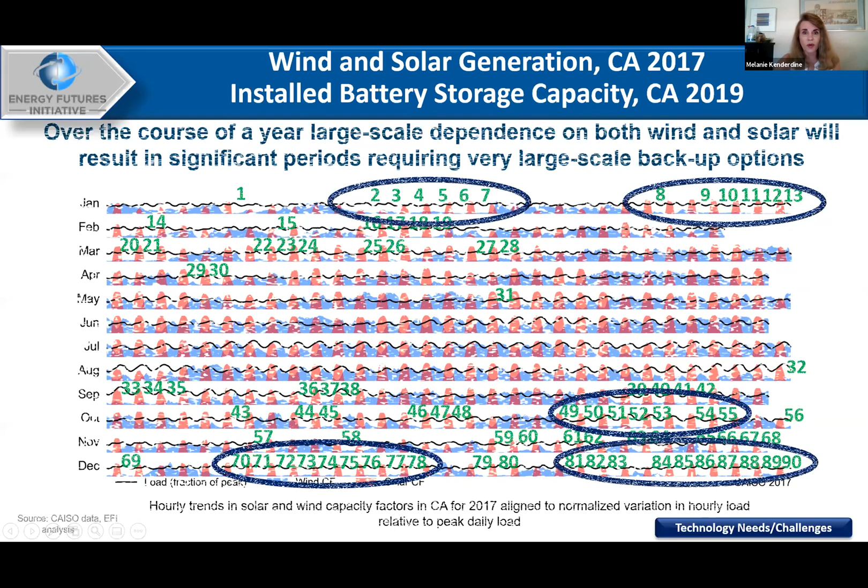And I would say the difference between California and Texas, it was just different times of the year when you saw no wind. And I should also say these are data. This is not modeling, these are data. So those are actual numbers. And so you had 1/4 of the year basically with little to no wind, and 11 days in a row with no wind.

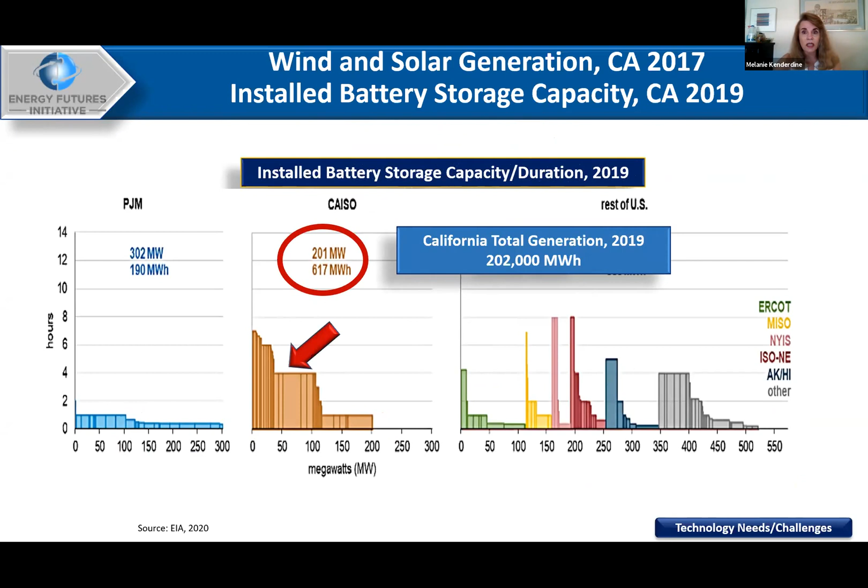This is installed battery storage in California in 2019, 617 megawatt hours. And those brown bars you see there, that is duration. So you have some 6-hour duration. I don't know what that is, okay? But it's basically 4 hours duration and 617 megawatt hours.

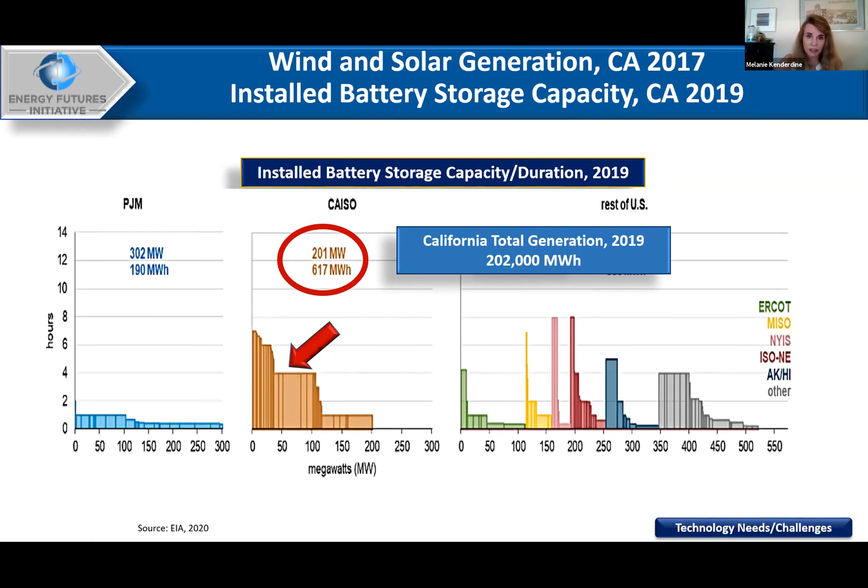California's total generation that same year, 202,000 megawatt hours. So to meet those 10, 11 days in a row with no wind, it's linear. As I understand it, it's 4 hours plus 4 hours plus 4 hours plus 4 hours. So you're talking about a lot of batteries here.

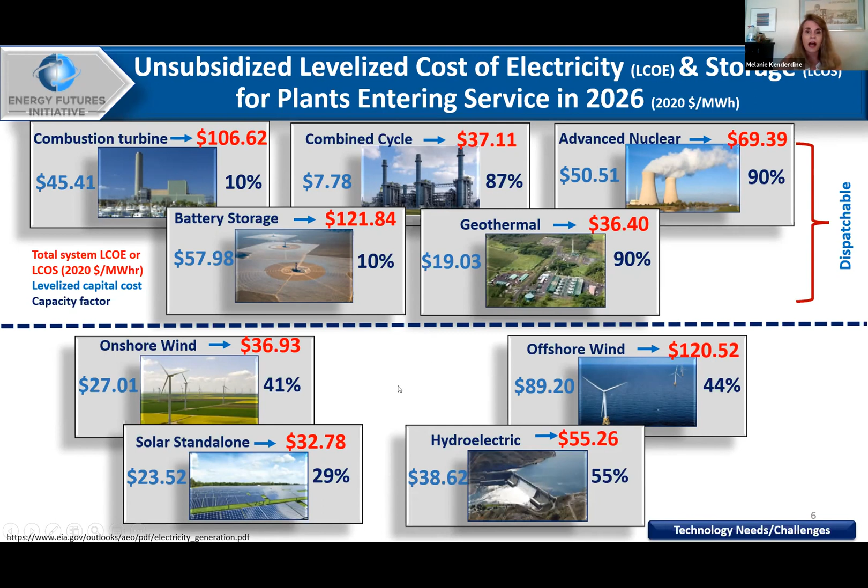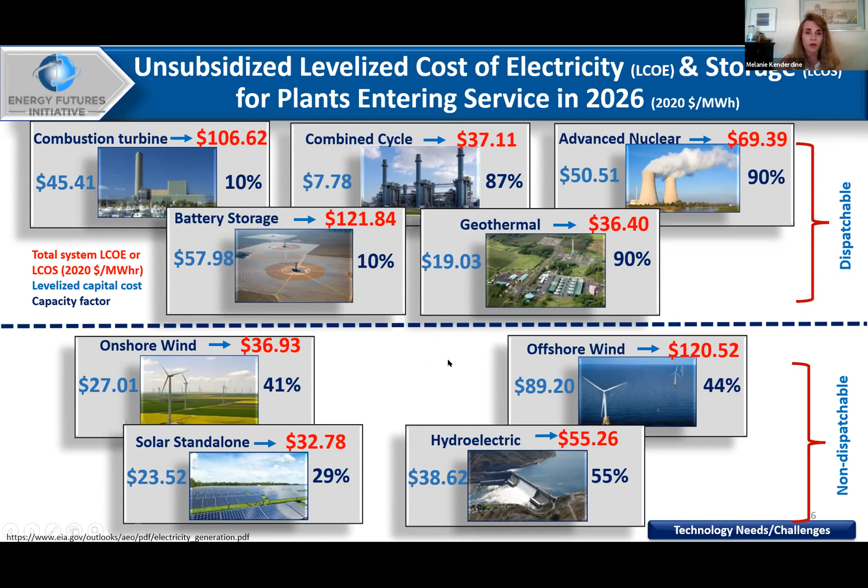One other thing I would add about this: hydro, for the first time ever, hydro, which is zero emitting, as everyone knows, has been moved by EIA to non-dispatchable. I was shocked to see this. I read their rationale because it's always been dispatchable. It's because of drought, melting glaciers, et cetera. Hydro is no longer considered immediately dispatchable.

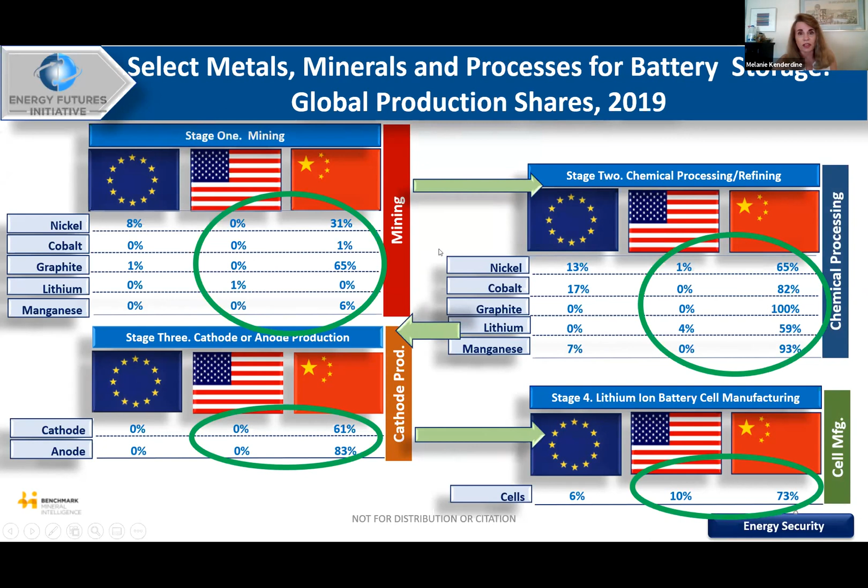Global production shares. This is the EU, the US, and China. And it's nickel, cobalt, lithium, manganese, et cetera. You can see there, US does very little, EU a little bit more. That's in the mining. In the processing, US very little. Look at China in chemical processing. Cathode, anode production, same. We're doing nothing here. They aren't in the EU either. China's doing a vast majority of it. Same thing in lithium-ion battery cell manufacturing. We need to build up those supply chains in the US.

And so that's just a little framing to give you some perspective on what IEA says will be the demand for EVs and grid scale batteries. Who's making them? It's China, and where the resources are for them, and the limitations, the 4-hour limitation that you see in current battery storage.

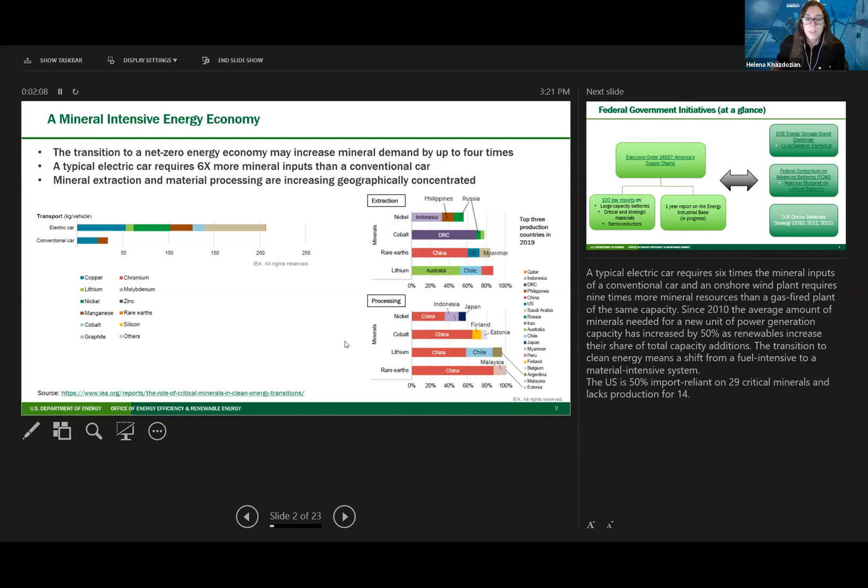When we look at extraction, for example, Australia is the #1 miner of lithium in the world, but they don't have the processing facilities. So it is dominated by China. And so as we're building up capacity, we have to think about the fact that even if we do material recovery or mining, if we don't have the processing and refining capabilities, we end up re-importing our own materials in the form of value-added components and manufactured products. So it's not the only type of supply risk, but it is one I wanted to underline today. Most of the production of materials for other countries are really concentrated.

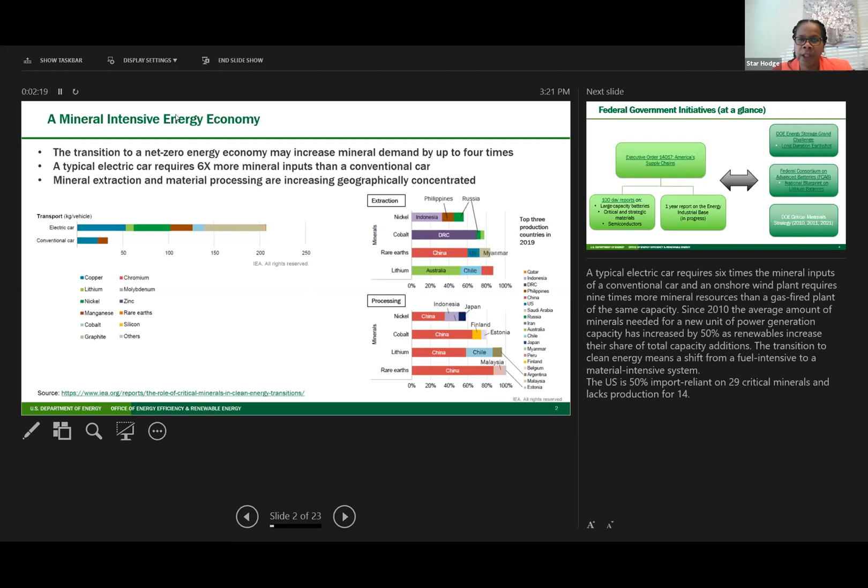Excuse me, Helena. Excuse me. Is your screen in presenter mode? The information is very small.

Thank you. That's better. Okay, sorry about that. Okay. Yeah, so let's pause there for a second.

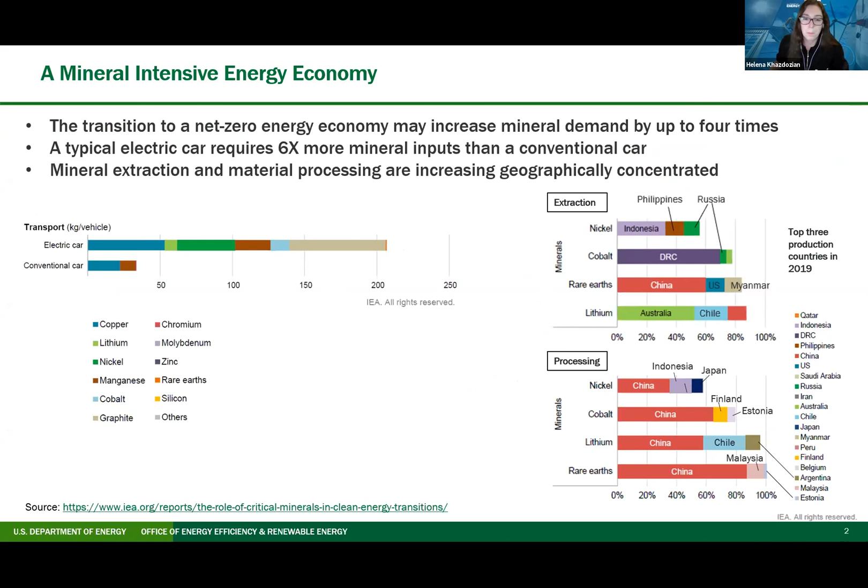But yeah, you can see, again, just 1 or 2 countries, sometimes 3, producing a particular critical material, with lithium, nickel, and cobalt being really important for lithium-ion battery cathode production. And so there's a lot going on in the federal government, which I think is a good thing. So this is not comprehensive, but definitely the highlights that I wanted to talk about today.

So earlier this year in February, President Biden issued an executive order on American supply chains, and that resulted in 100-day reports on different supply chain sectors. And the 3 I highlight here are large capacity batteries, critical and strategic materials, and semiconductors, all of which are used in electric vehicles. DOE is also currently drafting a 1-year report on the energy industrial base to better understand the risk there.

So from the 100-day reports, we get a good sense of what the risks are. We have recommendations on what to do to address those risks, and we're diving a little bit more specifically into particular supply chains in the energy industrial base report. I'll give an example. Everything's linked and you'll have access to these slides, but to address the risks associated with large capacity batteries and think about domestic production, we're working on implementing sustainability standards for federal procurement.

So as we try to stimulate some demand in the market and send some signals by converting federal fleets to electric vehicles, for instance, we're doing that in a way that is sustainable, transparent, and hopefully sets an example for others. So this is informing some of DOE's activities that are longstanding. We've been working in critical materials for over a decade in the applied space and much longer in the fundamental research space.

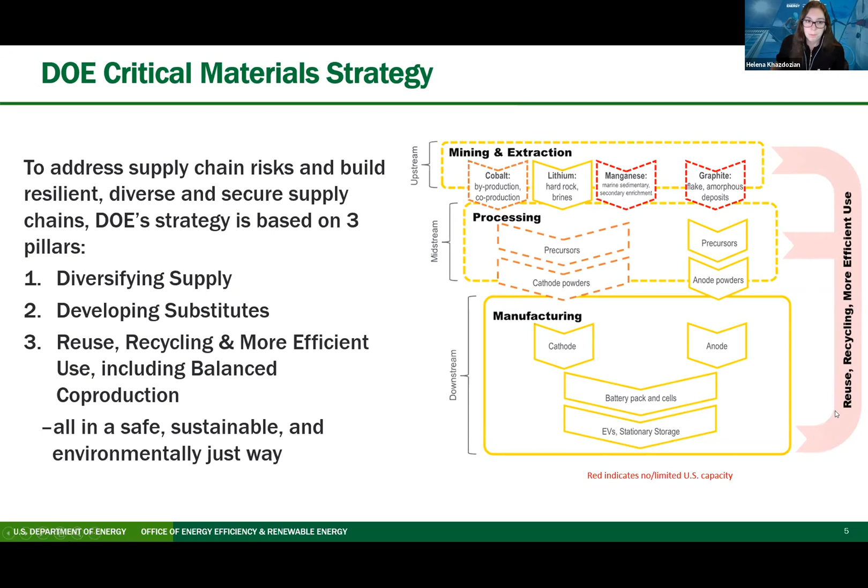That's a little bit better in anodes, but ultimately we're importing these components to make the battery cells and packs. And then of course we don't have right now the infrastructure for recycling. But it's not all bad news. We also have a lot of great opportunities.

So in diversifying supply, our Geothermal Technologies Office has a geothermal lithium prize. This one is for academics trying to look at cost-effective ways to recover lithium from geothermal brines. We also have some that are further down the innovation pipeline, looking at demonstration of these technologies that have already been proven out at the labs and continuous scales to make sure the economics work so they can be commercialized. I'll talk about those just in a second.

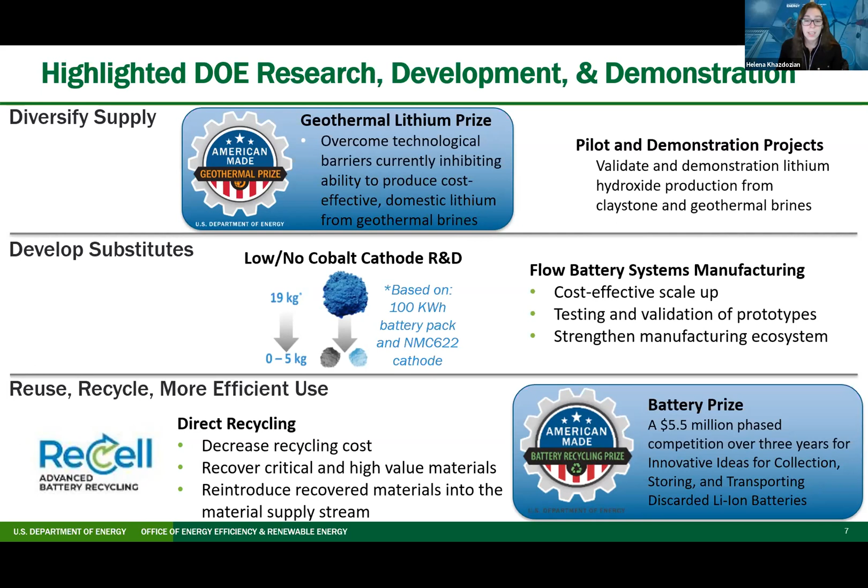Some successes. So recently, Rio Tinto actually opened up a demonstration plant that produces lithium carbonate for battery manufacturing. The economic processing method was developed in partnership with the Critical Materials Institute, which is an energy innovation hub funded by DOE. And so right now they're operating at 10 tons per year, and Rio Tinto is going to be scaling that up after they optimize through their demonstration to 5,000 tons per year. So this is a great start on diversifying our supply. It's leveraging waste from mining operations in California, and adding better economics to the overall operation there.

And then we also have a couple demonstration projects that are just getting started. So we have 2 projects looking at lithium hydroxide production from both claystone and geothermal brine resources, in particular from the Salton Sea. And hydroxide is going to be more important as we continue to manufacture batteries, especially as we reduce the cobalt content. We see more use of hydroxide than carbonate in cathode manufacturing.

And then we also have a project looking at production of synthetic graphite materials. The U.S. actually doesn't have any natural graphite mining operations, but we do have petroleum coke products, for instance, that you can use to make synthetic graphite. So that's what this project will be doing. So that's supporting both anode production with a graphite project, and cathode production with a lithium project.

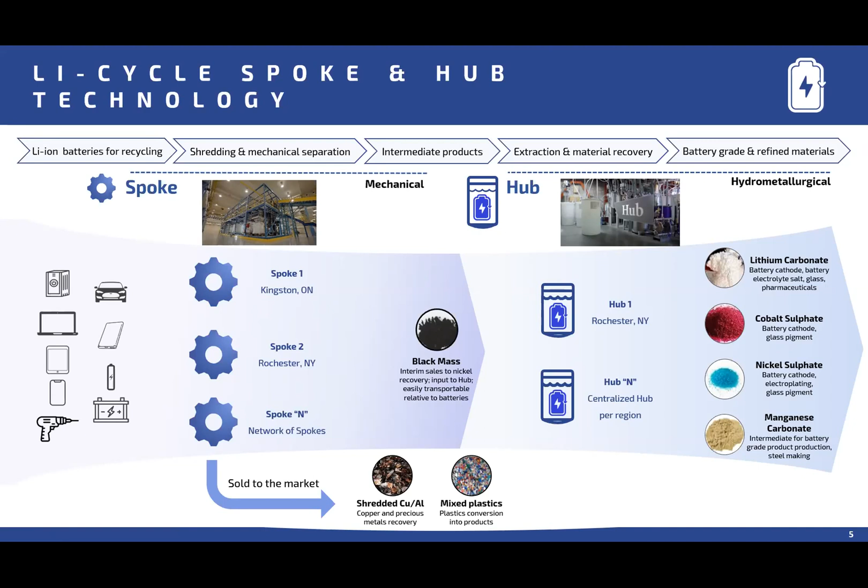So this just details a little bit about where we are in the supply chain and what we see our role being. And I think as some of our speakers have mentioned, recycling certainly cannot replace traditional mining in full, but we certainly see ourselves as an important part of what we like to call urban mining and helping provide a stable source to help offset the need for foreign mining as much as we've had to in the past,

and also work with our supply chain partners to meet this overwhelming demand, because as it's been detailed, there's certainly a tsunami of these end-of-life batteries coming over the next decade in particular from EVs. And so we're trying to make sure at this point that we're scaling up to meet that challenge.

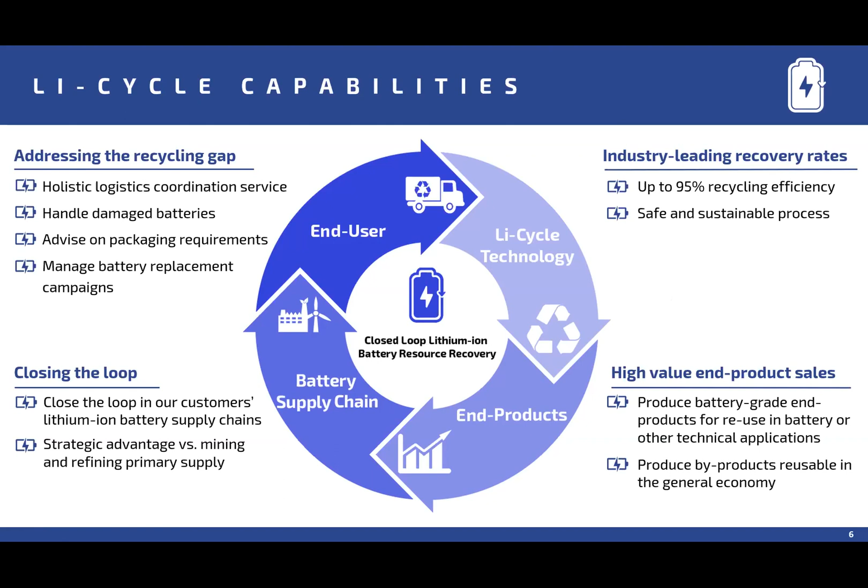So this gives you a little detail about the spoke and hub, and I spoke to some of this, so I won't fully re-engage on this, but we have the ability to accept all sorts of lithium-ion batteries, regardless of chemistry, form factor, prior application. As I mentioned, the environmental benefits, no wastewater production, low air emissions.

And then at our hub, we use a hydrometallurgical process, which is known as a wet chemistry process. So it's a low temperature operation, as opposed to the pyro process, which obviously has a higher temperature, and also you lose some of the mineral recovery rates in that process. So that just gives you a little background there on that.

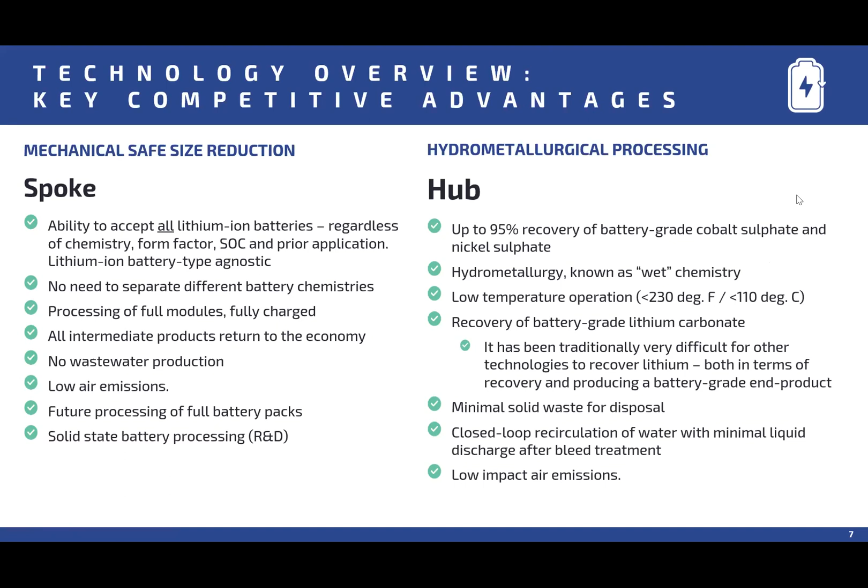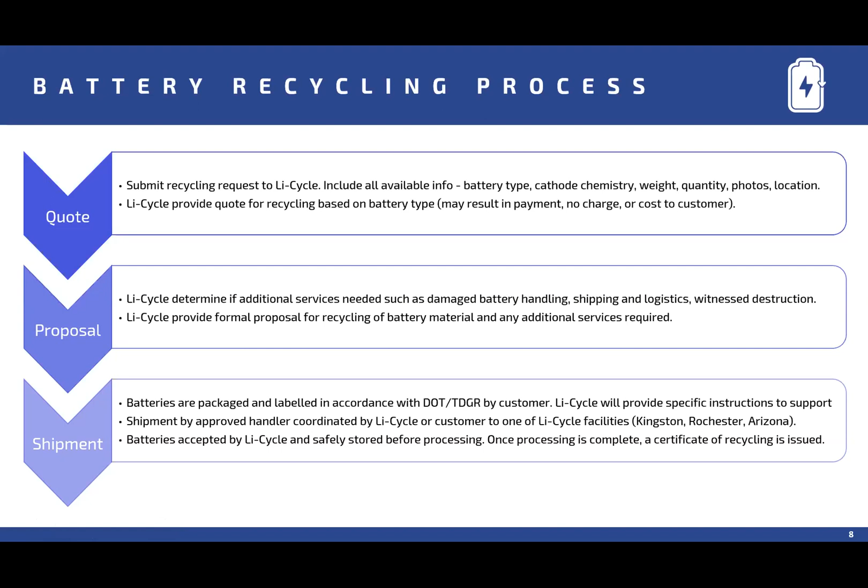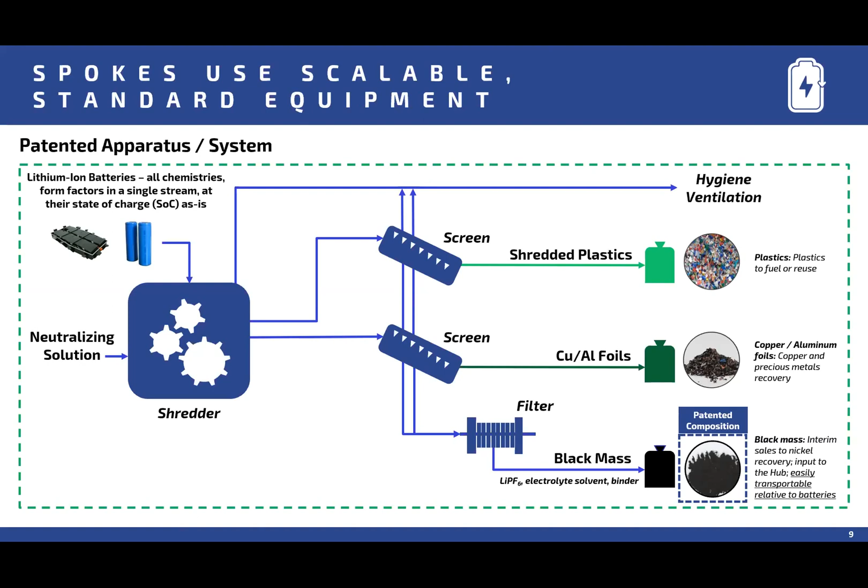And then it filters the black mass, which is our interim sales to nickel recovery, and easily transportable relative to batteries, which is important to note because the black mass, once it's gone through that shredding process, it is much safer to transport than traditional batteries in their solid state.

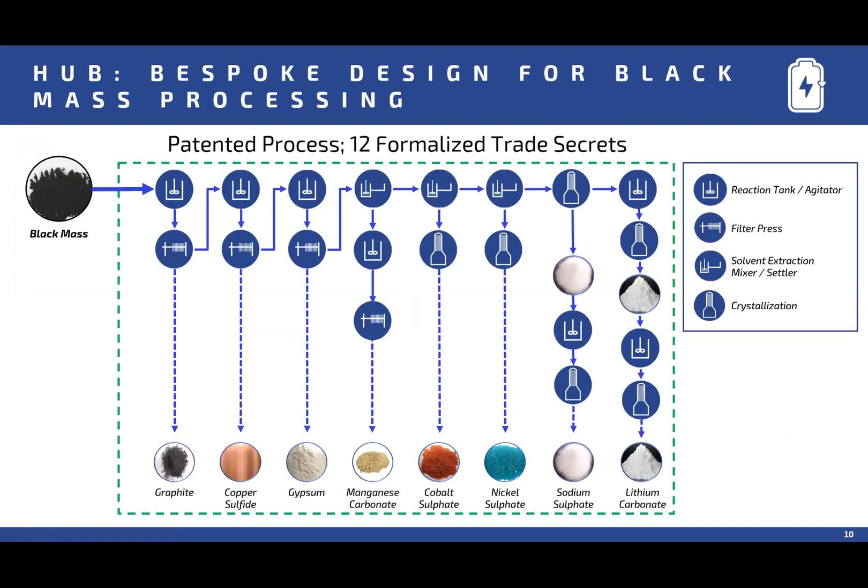So this details the hub, which is our patented process, 12 formalized trade secrets. You can kind of see the screen there and some of the output products that we'll have once the hub is up and running.

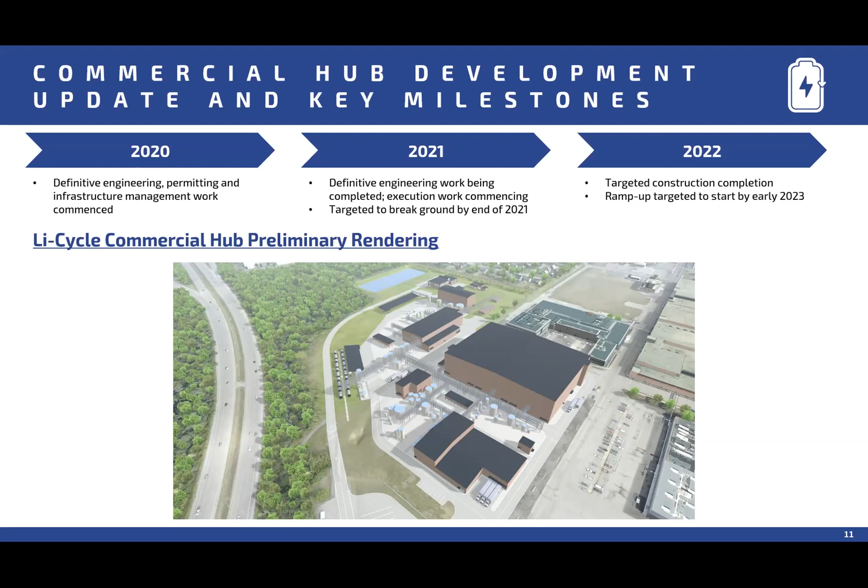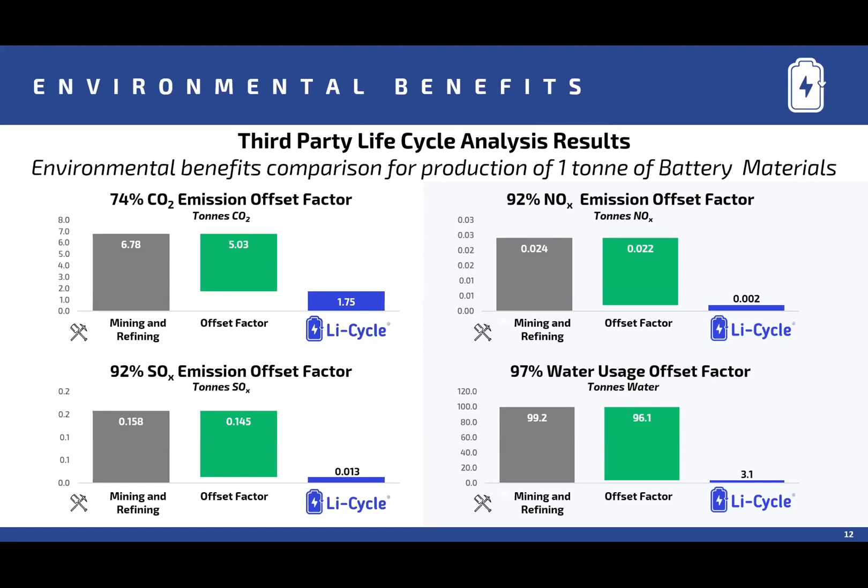And here we have our life cycle analysis results. This was done by an independent third party. Just goes into some of the environmental benefits of Li-Cycle and our emission offsets factor and our water usage offset factor. As you can see, there's a pretty substantial difference from other forms and other recyclers.

So in here details the pyro process versus our process, which is that wet chemistry hydrometallurgical process. So we have significantly reduced GHG emissions in comparison to competing pyro recycling processes. And also, in terms of PFAS, that's obviously something that's been a hot topic for a few years now. Our process does not produce that. We avoid that issue due to the hydro process that we use and that patented hub model with the shredding process. So this just highlights some of those benefits.

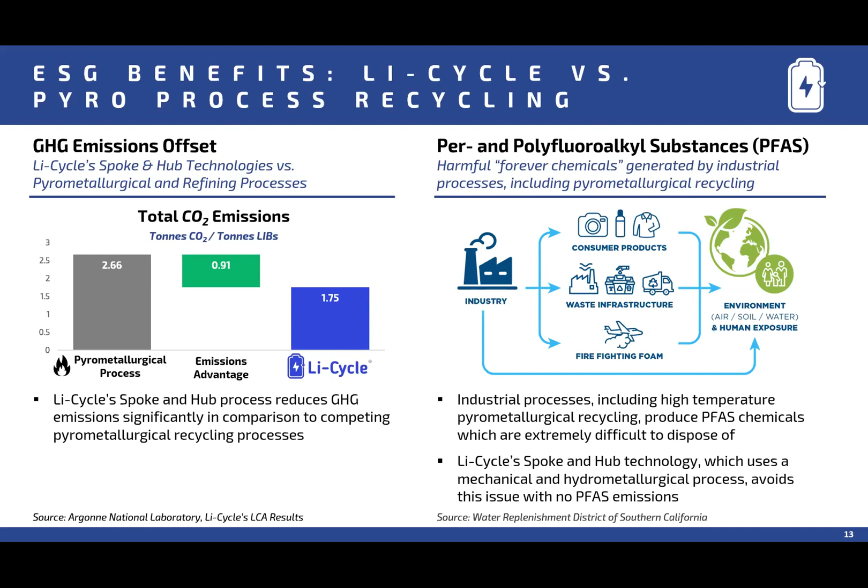Thank you, Harry. That was great. I don't see any questions in the chat, so I'll start out with a question for Austin. During your presentation, you were talking about how consistent policies will help with more widespread EV adoption, and then you mentioned a little bit more about investment at the middle supply chain. Can you expand a little bit more on that? And also, do you see any other areas where we could improve on EV adoption?